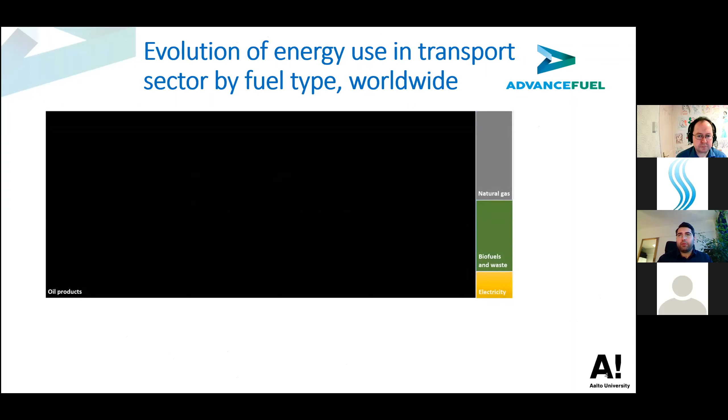So when looking into the total energy used in transport, it was 2.8 gigatons of oil equivalent in 2017. Please take this blue area as the area that represents this 2.8 gigatons. The black part of that area is oil products. Here we see natural gas, biofuels and waste, and electricity. When we turn it into a percentage, we see that it's over 95-96% fossil.

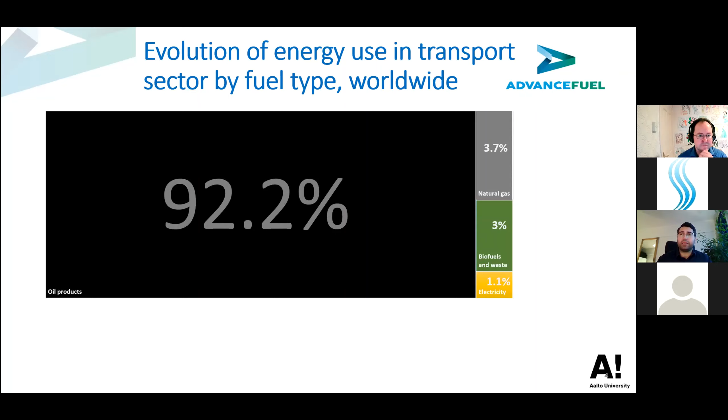And when speaking about the various technologies, we see that we need all of them to go hand in hand, because the magnitude of decarbonization is so big that at present we unfortunately have no luxury of selecting just one, either this or that. I think we should go with all of them, because by 2050 the challenge will be much bigger.

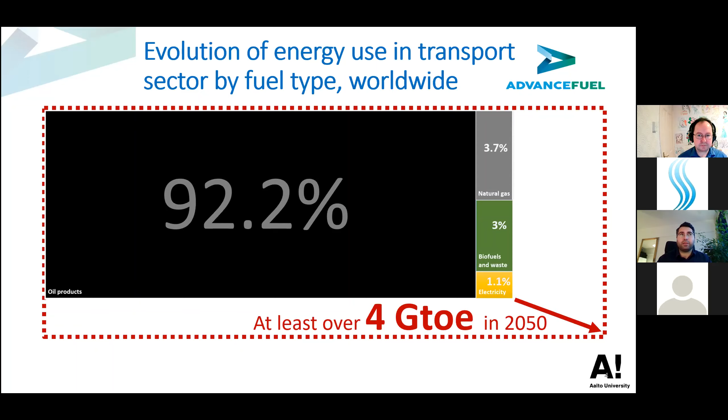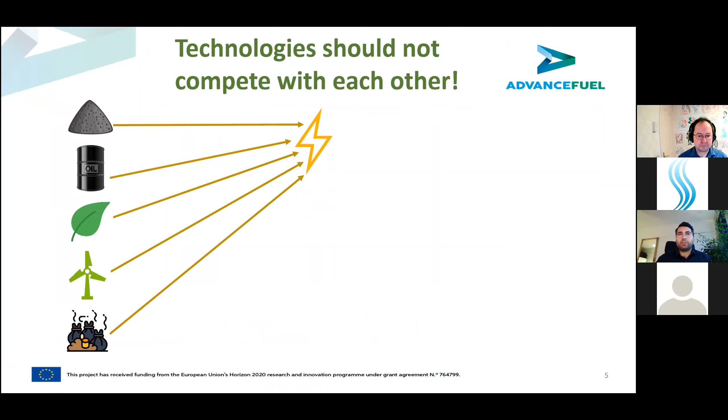And the known fact is that we can use the same feedstocks to produce either electricity or liquid fuels, and then use it to power mobility. So in our eyes, we should rather focus on eliminating unsustainable feedstock as the most important priority, to bring real change from the environmental perspective.

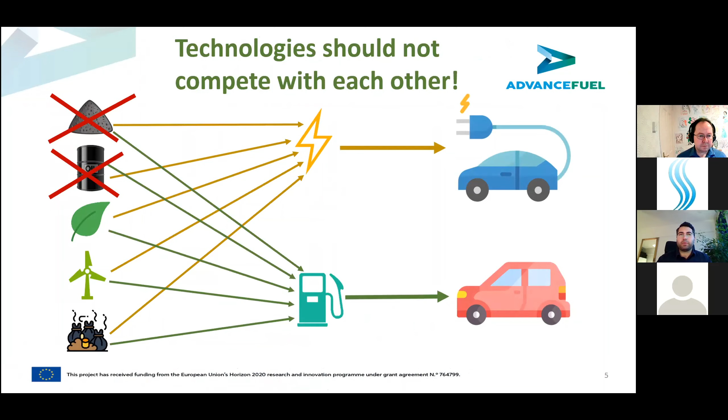As we see, having a tailpipe on the car does not necessarily mean we have higher emissions. If we just substitute the fuel for a more sustainable one, we might end up with emissions even lower than electric vehicles. So in that respect, we need to take into account life cycle emissions, not tailpipe emissions, to bring real change and meet our climate targets.

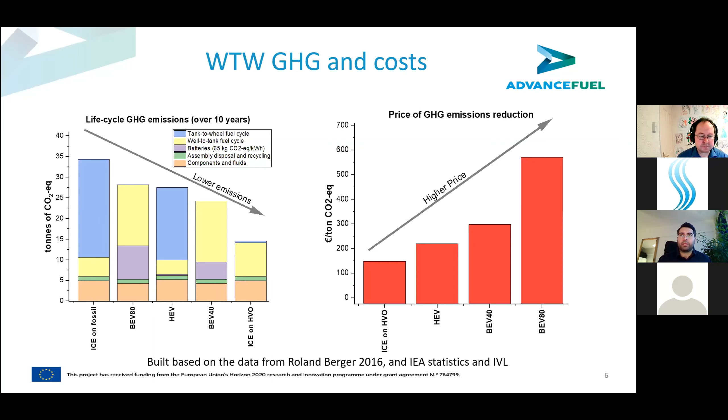Another important factor is the need for liquid fuels versus electrification. As we know, electrification is easiest in light duty vehicles, and it grows more difficult with rail, heavy duty, marine, and aviation, while the need for liquid fuels increases in the opposite direction.

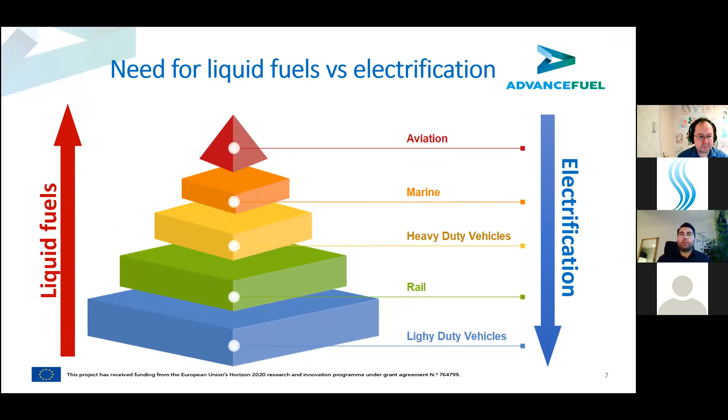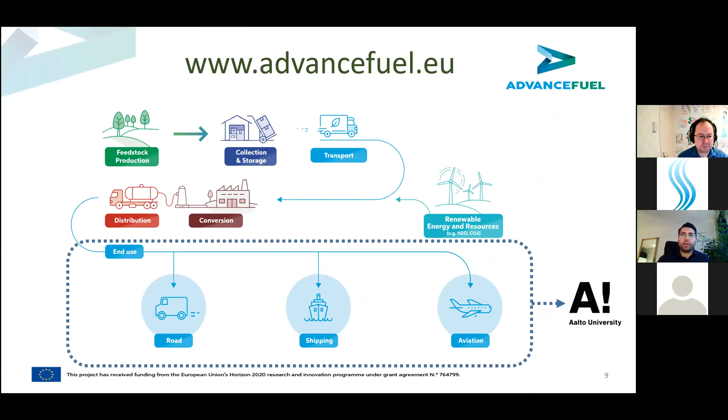The AdvanceFuel project is the one we were working on. It's part of EU H2020 projects, and it's a coordination and support action from the EU Commission. The target is to facilitate market rollout of advanced liquid biofuels in the transport sector between 2020 and 2030 and beyond. The AdvanceFuel project focuses on the whole value chain, but we at Aalto are the only partners focusing on the end use - how those alternative fuels perform in end-use sectors.

We had a task to bridge fuel properties with engine performance. We know that we have different engines - light duty, heavy duty, marine, aviation. They use different fuels, those fuels have different properties, and different properties are important for different sectors.

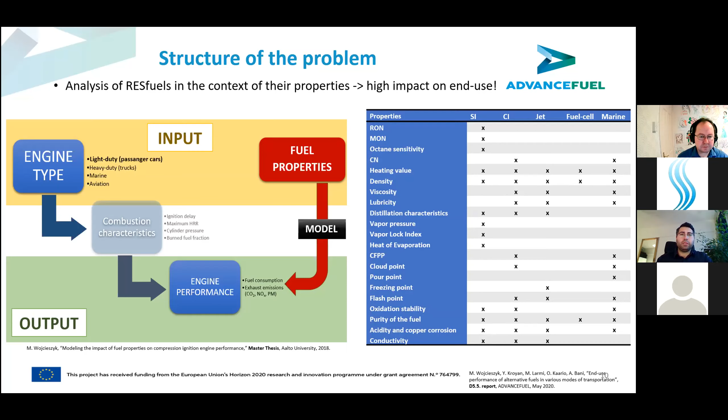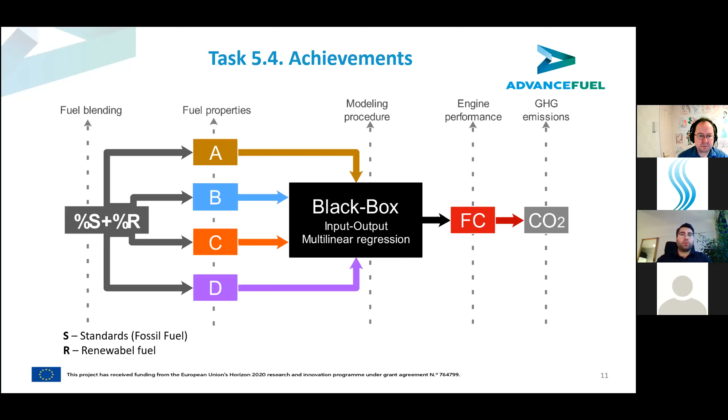So what we did basically is take data when a standard fuel, marked as S, was blended with some renewable fuel, marked as R. That blend ends up with different fuel properties than the standard fuel alone, yielding different fuel consumption and different emissions. Our task was to find the bridge directly between fuel properties and engine performance - not fuel components, but fuel properties and engine performance.

And we developed 7 models for air, land, and marine transportation. We equipped these all models into the user-friendly tool under advancefuel.aalto.fi. I will get back to the tool a little later in my presentation. So basically we developed models for jet engines, spark ignition light duty engines, compression ignition engines, flexi-fuel vehicles, fuel cell vehicles, heavy duty compression ignition, and marine compression ignition.

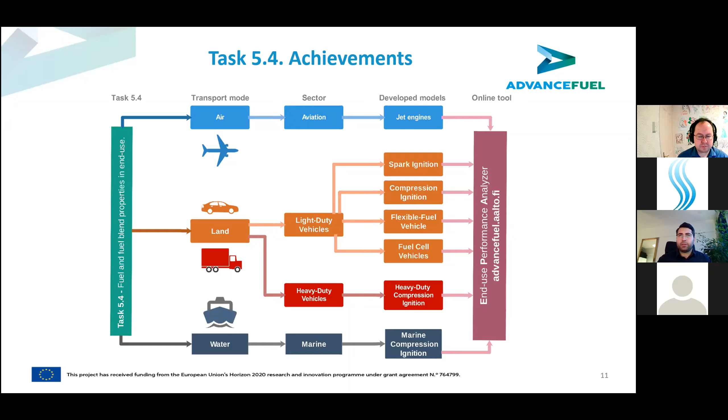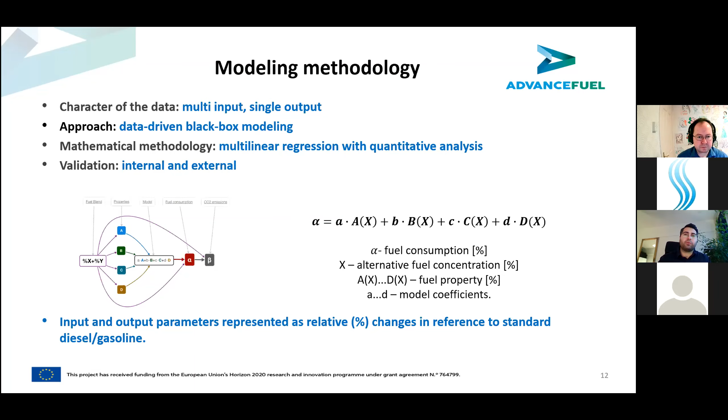We've been mainly using multilinear regression with quantitative analysis, so statistics involved to determine the significant properties. And we developed linear models that represent the effect of the most significant properties that survived the modeling procedure. All input and output parameters are represented as percentage changes relative to the reference fuel, so for example diesel for compression ignition, gasoline for spark ignition, jet A1 for jet fuels, and heavy fuel oil for marine.

Let me show you some examples. The model for spark ignition engines looks like this: we have the effect of the research octane number, density, lower heating value, and oxygen content. For those who don't know, research octane number is a measure of the reactivity of the fuel, how eager it is to auto-ignite under compression. The higher the RON, the better the auto-ignition properties, so the fuel doesn't auto-ignite before the spark.

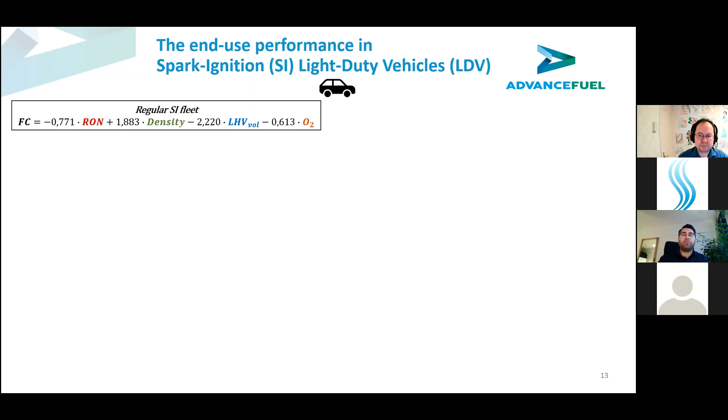We know that different fuels have different properties, and based on real data taken from different labs, chassis dyno runs of the New European Driving Cycle from different parts of the world, we took this data, created a single matrix, did this modeling, and achieved a model with pretty high R-square. We did the same also for the flexi-fuel fleet.

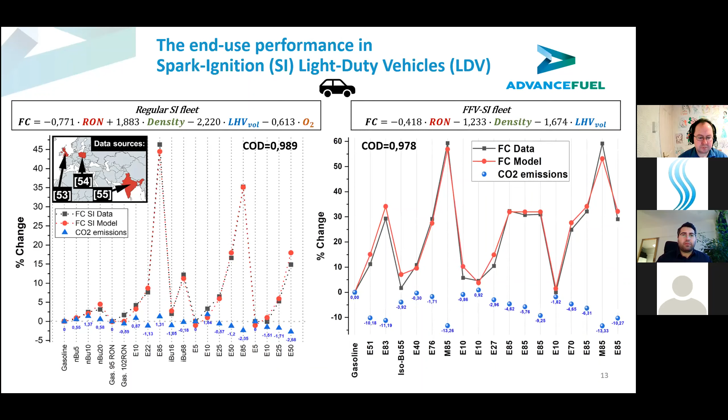What's interesting here is that in case of alcohols, we see that E85 can have about 35% higher fuel consumption dependent on the actual concentration of ethanol. E85 has a very wide range—it could be 70% ethanol inside the blend and still called E85, or the upper level like 85% and still called E85. So a lot depends on the actual ethanol content; the fuel consumption changes.

But what's interesting, we see here the tailpipe CO2 emission—these are not well-to-wheel, but tank-to-wheel CO2 emissions. Even despite this higher fuel consumption, as high as 35 or 36% in the standard fleet, we see that the CO2 emissions are still lower than for gasoline itself, talking about raw CO2 emission. And when we take into account the well-to-tank part, sustainability in that part, the reduction is tremendous.

Of course, these effects of alcohol blends in flexi-fuel vehicles are a little more effective, because flexi-fuel vehicles can adjust the engine so that they can utilize higher RON a little better than standard engines. So they can advance the spark timing, increase the boost pressure, two different things depending on the engine map and fuel engine loop. They can adjust a little better here and utilize these effects, and of course it decreases the raw CO2 emission of those ethanol and alcohol blends in general even further.

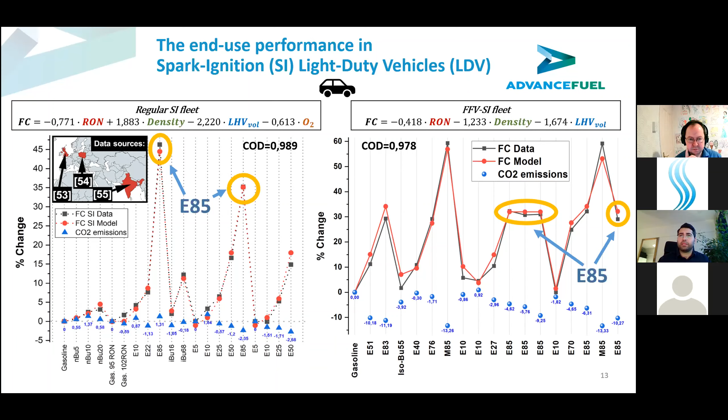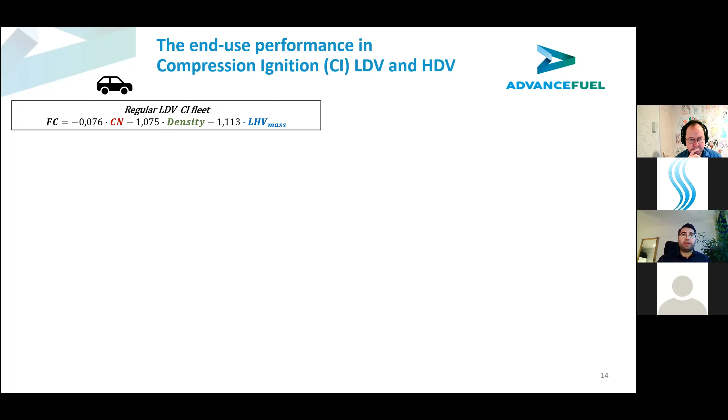Moving forward to the compression ignition side, we see the effect of cetane number, density, and lower heating value mass base. Cetane number is a property similar to RON, it also tells about reactivity—the higher the cetane number, the more reactive the fuel is. For spark ignition engines, we don't want reactive fuels, but in compression ignition engines, we want reactive fuels. We want the fuel to ignite during the compression stroke, as there is no spark—it's compression ignition mode.

Here we see the model, also developed based on the European driving cycle chassis dyno run experimental data, again with a pretty high R-square. What's interesting here is that HVO blends can have as low as minus 10% raw tank-to-wheel CO2 emissions compared to regular diesel. And if we take into account the well-to-tank part, as in previous cases, it's much more sustainable. Studies show that HVO has lower life cycle CO2 emissions than an EV driven in Norway, and E85 for spark ignition engines has slightly above that level.

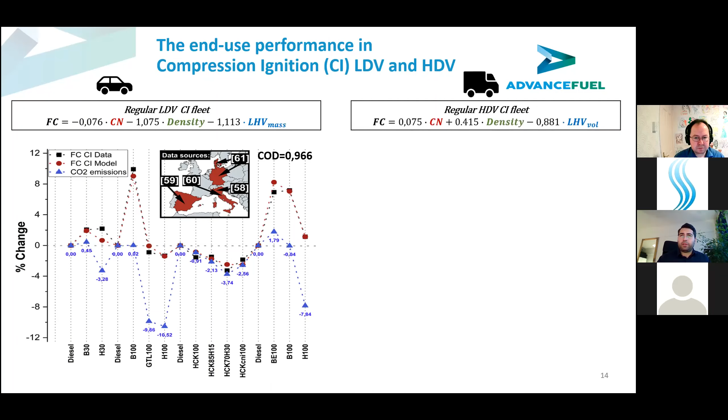Then we see the effect of cetane number, density, and lower heating value on heavy duty engines. The effect of HVO is stronger in smaller size compression ignition engines than in heavy duty engines, but the trend is the same—CO2 emissions are lower, and we can see that here as well.

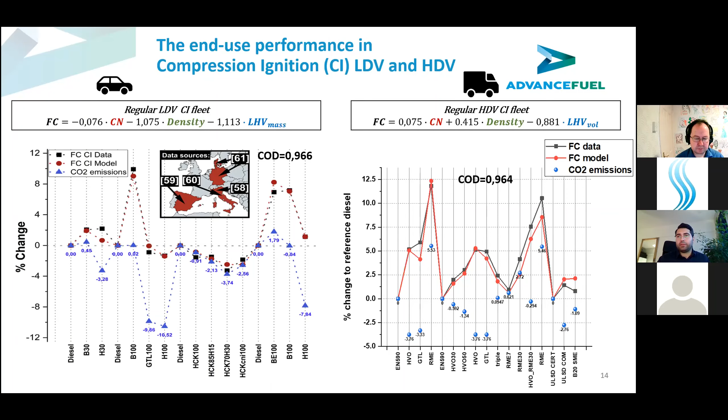Then going to the marine side, we see the effect of viscosity, density, and lower heating value on different kinds of SVO type, straight vegetable oil type fuels, like soybean oil, sunflower oil, also palm oil, and animal fat.

For aviation, similar properties apply as in the case of marine. Most of the fuels are synthetic paraffinic kerosene, but also synthetic isoparaffins, HEFA, ATJ, and so on. ATJ, alcohol to jet, is actually also synthetic paraffinic kerosene. The model has very high R-square in the case of aviation.

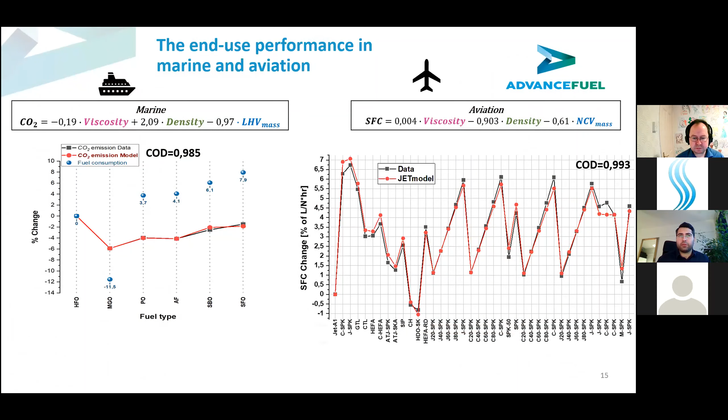So we took all those models and made a user-friendly tool, which I will show a little bit later. But first, a few observations on good fuel candidates by 2040, realistic from our perspective. For aviation, we see synthetic paraffinic kerosene made out of HEFA, alcohol to jet, and so on. These drop-in solutions are the ones we see as most applicable.

Then on the marine side, as Brian and Professor Martti Larmi mentioned already, hydrogen has big potential. The good thing about hydrogen is that it has no sulfur and no carbon, so it could be blended also with LNG. There are big possibilities in front of hydrogen.

Then DME is also an option, but DME has high price and low availability, so it's rather too premium a fuel for the marine side. Maybe more for heavy duty.

Then we see biogas. Of course, now many ships are switching to LNG, and this creates drop-in possibilities for LBG, so liquefied biogas. LNG is cheaper than heavy fuel oil and has no sulfur content, and there is some moderate infrastructure already. In marine, we need to have infrastructure; we need to have this availability. It's very important.

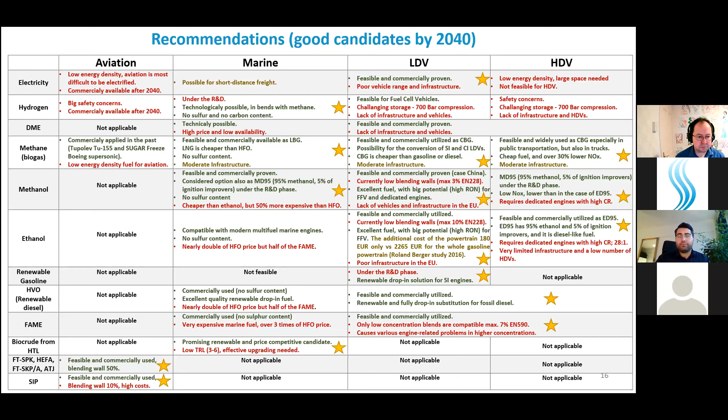For the light duty vehicles, renewable gasoline is also something under research - something like HVO for diesel, so renewable gasoline as a substitution for regular gasoline. And of course FAME, but FAME is not the best, not a game changer here. It could only be blended at 7%; above that level there are different compatibility issues. So, of course, feasible, but limited.

We need to always look into the infrastructure and fuel compatibility when looking into the time frames when we are able to achieve given targets of decarbonization. We need to see, if we consider some fuel, whether it needs a dedicated engine, small retrofitting, drop-in, and where is the infrastructure.

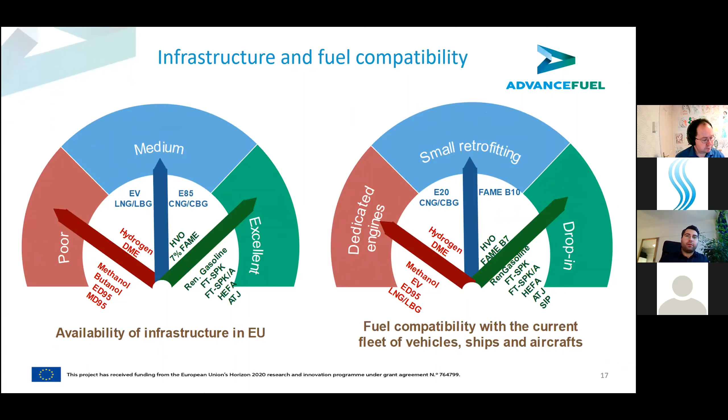And the end-use analyzer. So if you go to advancefuel.aalto.fi, after a very simple free registration, you are able to proceed directly to the tool and do this. Here you have the option to select the transport mode, surface, transport sector, fleet type, engine type.

Then you have two options: either go to predefined fuels, so you can see some fuels with standards that already exist or are known, or you can go to the custom fuel. When you choose predefined fuels, you select the fuel and click calculate.

For example, here we have HEFA, synthetic paraffinic kerosene, 50%, and we see the change in the fuel consumption and in the CO2 emission. You also have a full description, recommendations, and references where you can reach for more details on what's happening on the back end.

Then custom fuel. Here, if you know the raw fuel properties, you can select raw inputs, and then you have a reference fuel there. You can change the properties of the reference fuel. In the case of the jet engine, those are the properties of exact Jet A1.

And then for the alternative fuel, you just write, for example, net calorific value mass-based, say 40, density 800, and it calculates the relative change and computes the change in fuel consumption and CO2 emission.

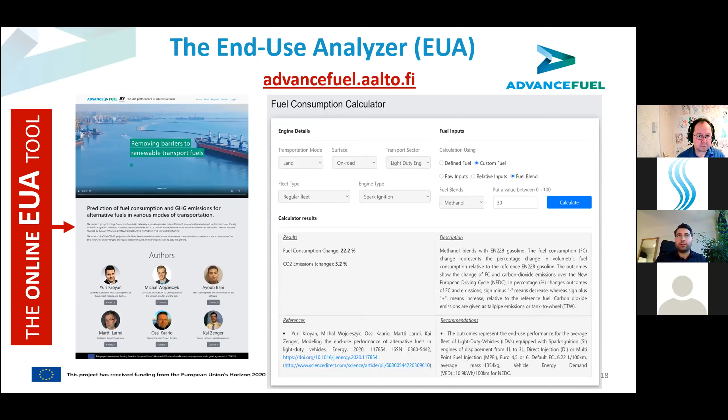Yeah, we published part of our models. Another part is on the pipeline in the publishing process. So I will share maybe later on this presentation with you, so you can reach out if you are interested.

To read more, and some few ideas for collaboration that just came to my mind: if we find common interest, for example, LCA analysis, energy scenario development—what are the things that are, from a real perspective, possible when we speak about technology advancement, infrastructure, and the whole change in that respect. We need to take into account many aspects. So maybe we could be of some help, some of our expertise could be utilized here.

Then environmental impact analysis, low cost effective decarbonization pathways—I think this is a point where we could also be of some help.

Then I was thinking that some common databases could be a good thing to create, that we could utilize. Perhaps you could utilize ours for your modeling or some further analysis, or we could also utilize some of the databases that you are able to share with us.

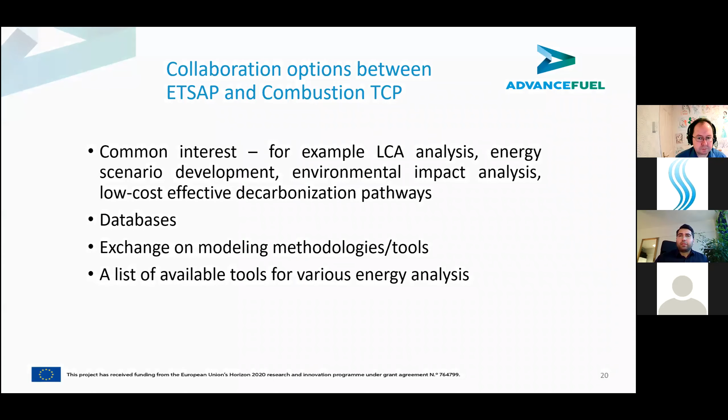So that would be all from my side. I want to just highlight that all the research I presented is not only my part—my good friend Michał Wojcieszek is working hand in hand with me on all these models, and Professor Martti Larmi and our advisor Ossi Kaario also.

So thank you very much for your attention, and I would be happy to hear your comments and questions if there are some.

Thank you very much, Yuri. That was excellent, a very useful presentation of your work, with suggestions at the end in terms of areas. I have one quick question on one part of that slide where it talked about options and compared different options.

You mentioned that LNG is cheaper than HFO, but it wasn't clear to me about LBG. LBG is more expensive. Okay, because it was in that section. Okay, thanks, that was just a clarification.

Okay, we've got a couple of suggestions coming in the chat. I want to open the conversation now to the floor. As I've indicated, I wanted people to put in questions either in the Q&A or in the chat.

We've got one suggestion from Tom Kober, which would be that an interesting collaboration could focus on decarbonizing aviation and new fuels specifically for this sector. I think Tom sent that before seeing your slide where you showed the range of options for the different transportation modes.